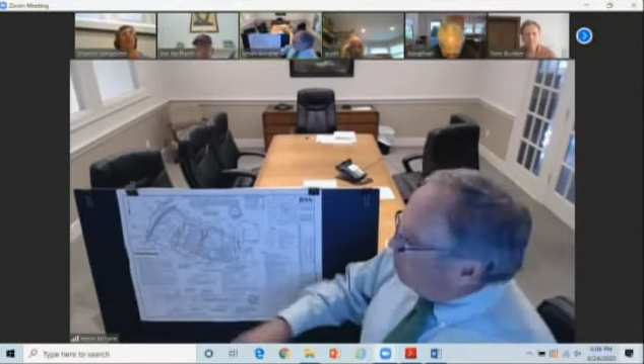Hi, hello. I know it's difficult to see, but for the record, Kevin Corain, I represent the Sperzels in connection with this raise and replace project under 117.1.

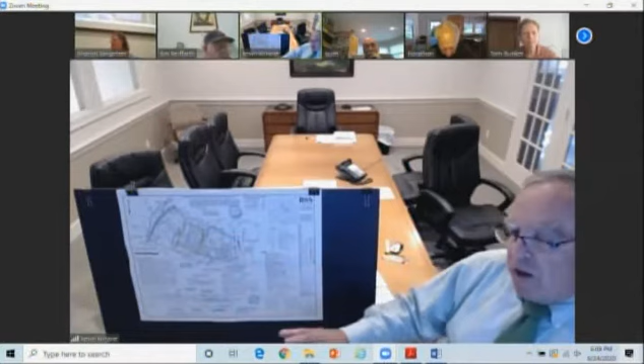I don't know whether you can see it on my plan, but I have outlined in orange trying to indicate where the existing structure is, and you can see how the new structure is overlaid on that particular existing structure to give you an idea of how the building location has been modified and changed. The existing structure was non-conforming in 2 aspects.

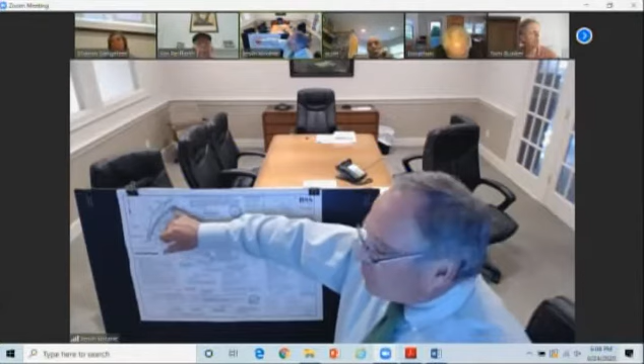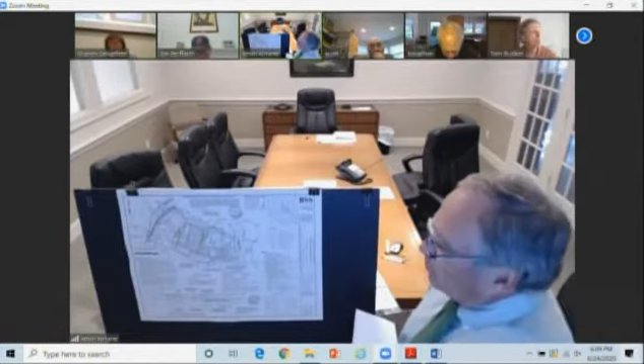First, it had a non-conforming side yard in what I would refer to as the northwest corner, and a non-conforming setback from the wetland in what I would refer to as the northeast corner, and that is from a large deck, shown on the plans that I've attached and also on the photographs that we have provided. In the middle of that deck, to the rear of the existing structure, is a swimming pool as well.

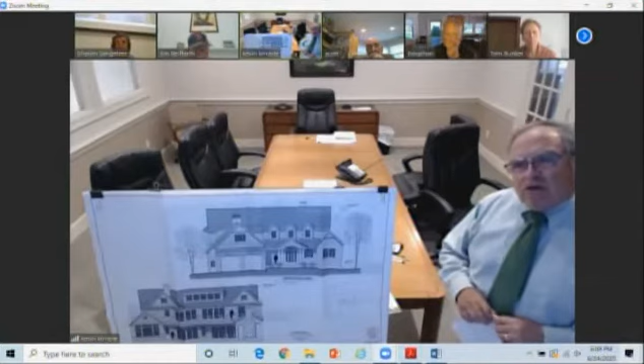We have proposed to remove that existing structure and replace it with a new structure that actually conforms to the side yard setback criteria and also the setback from the wetland. So we have eliminated the 2 non-conforming aspects of the structure: the side yard aspect and also the setback from the wetland resource area.

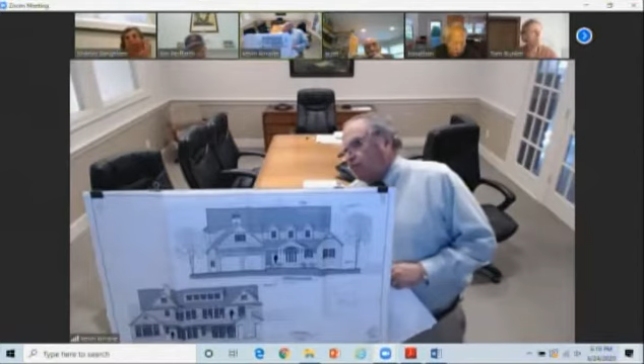So currently, under the revised plan, the building itself is set back 15.5 feet from the sideline, some 52 feet from the bank, and 56 feet from the marsh. So those two nonconformities have been eliminated as part of this new proposal.

The building that I show you here, with the elevations that we provided, the building design by Walter Yarosh - you should have copies of those. I've attached those as well to my written presentation, and the floor plan of what is being proposed as that structure.

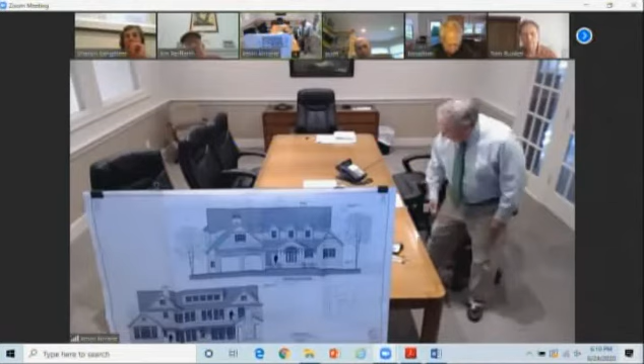The lot itself is a combination of two lots shown on a couple of different land court plans. The lot contains just over 18,000 square feet. It was built back in the 80s, and currently has a 4-bedroom structure on it, which you can see in the photographs that I provided. It also had a so-called cabana, which basically provided another bedroom on the existing property. There's also the accessory pool and the accessory dock complex that you can see on the development plan as well.

The new structure will contain the 4 bedrooms. There won't be an outbuilding or cabana or anything of that nature. There will also be an attached garage and a swimming pool, which will be surrounded by earth with patio blocks or something like that along and around the pool.

It's situated in the R3 zoning district, and as you know, that requires 40,000 square feet of lot area and 150 feet of frontage. This lot is non-conforming in that it does not meet those two criteria, and in addition, it allows for a maximum lot coverage of 20% and a building height of 35 feet.

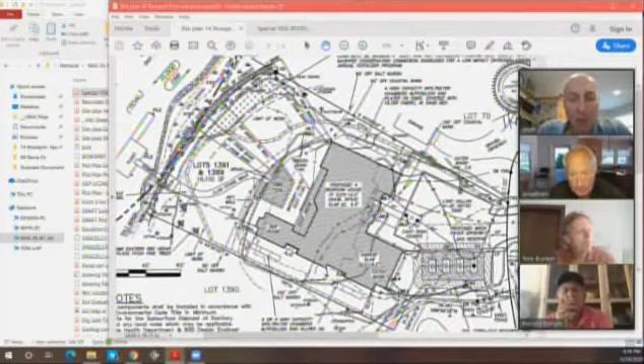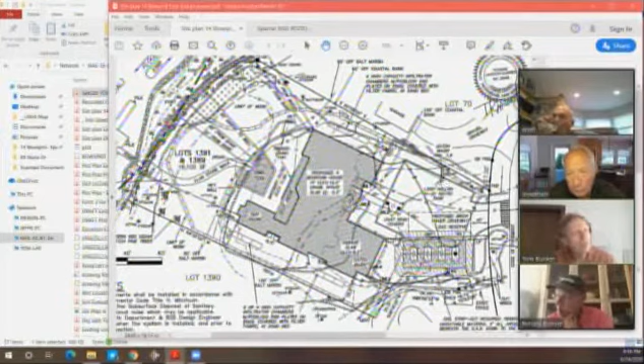Okay, yeah, there's drainage, and I'll let Tom show it. Down on both sidelines, high capacity infiltration chambers at the front. On the south side, two sets of them at the front and the rear, and on the north side of the property line, another set of 4 infiltrator chambers there for the roof runoff. There's also a catch basin in the driveway, which will direct to the infiltration chambers, one on the north side and one just outside the garage door. There's another little catch basin that will send more of the driveway runoff into the infiltration chambers.

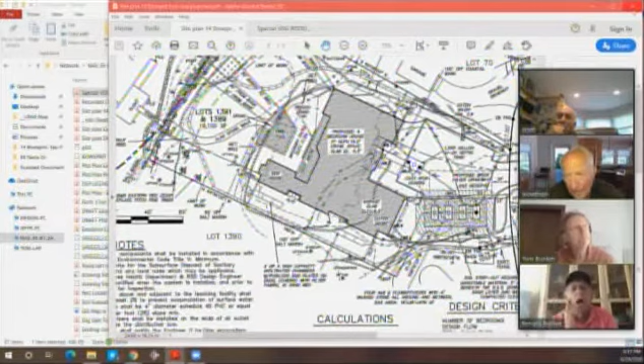Excellent, excellent. That's really the only question I had. I was out to the site, I think it was yesterday, nice site, nice building that's coming down, and I've looked at the plans. I really don't have any questions whatsoever on it.

I have a question, if I may, Mr. Chairman. Sure. Could you bring the site plan back up again, Tom, please? Sure.

Hold on. Where is he? Click the wrong button. Oh, there he is.

I think Kevin had mentioned that part of the existing home was closer than 50 feet to the existing wetland or resource area. I don't know what that dimension is, but if you can go to your proposed home - okay, this is the existing here in this corner. What's the existing? So what are you, 46 feet?

Looks like 52, you're not counting the patio. It's 52 to the structure. I think the dimension Kevin was reading is 46 feet - the arrows get a little confused up in this corner. It's 46 feet from the patio to the wetland, and also 46 feet from the structure to the top of the coastal bank. 52 feet at this point from the structure to the wetland. So as far as the structure to wetland, it meets the 50.

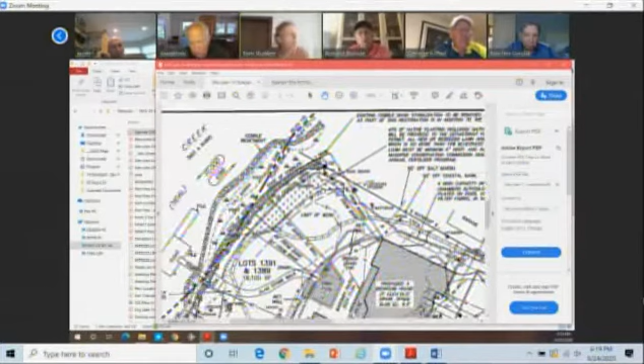If you see this line, my hand is tracing, that's the 50 feet from the wetland. So what is inside of it, but the structure is just outside of it. If you could show - all right, so the proposed, in the same row: 46 feet to the bank, 50 feet to marsh. So 40 feet is still all right. I'm fine, no problem. Got it.

Okay, will I stop the share here? All right, Bill, I think you raised your hand.

I just wanted to say I don't have any issues with anything I've seen. Oh, I'm on mute. No, he just muted himself. You just muted yourself, you weren't on mute. Now I'm not on mute. Okay, no, now we can hear you, sorry.

I'm not technically astute, I don't have any problems with this. I think the project makes this more conforming than it was before, so I have no issues whatsoever. I agree with Bill. They could have gone a lot closer to the lot line the way our rules are, and they didn't - they pulled it away. I agree.

Jim Gould, any comments at all? No, no, thank you. Jim Rathod? No. Okay, how about you, George? Nope, it looks fine to me. Yeah, as I say, it looks like a slam dunk to me. I have no issues whatsoever on it. It's a nice looking project. You've gone over and above by pulling it away from the sideline. You've met every criteria, I've got no issues whatsoever.